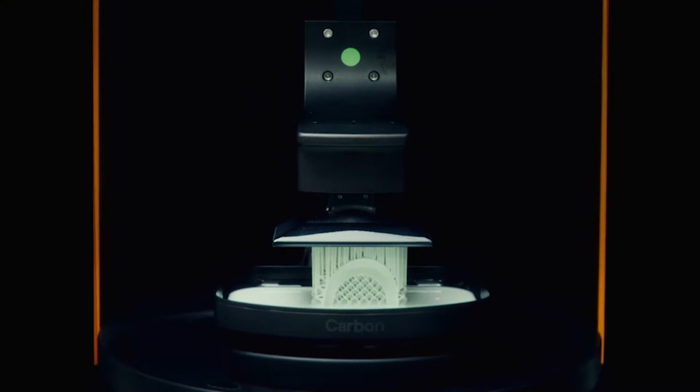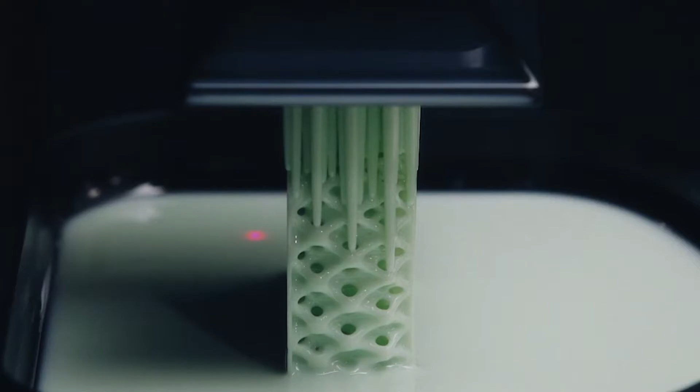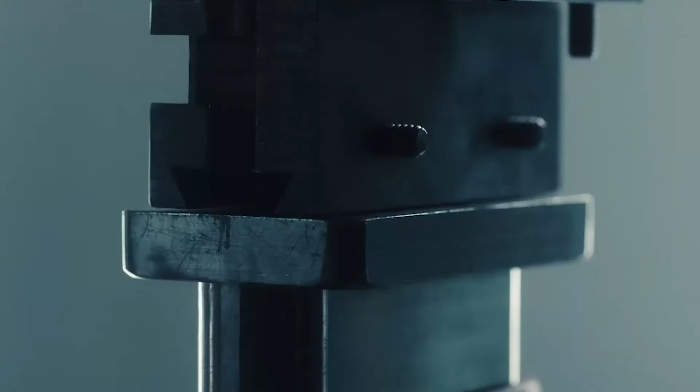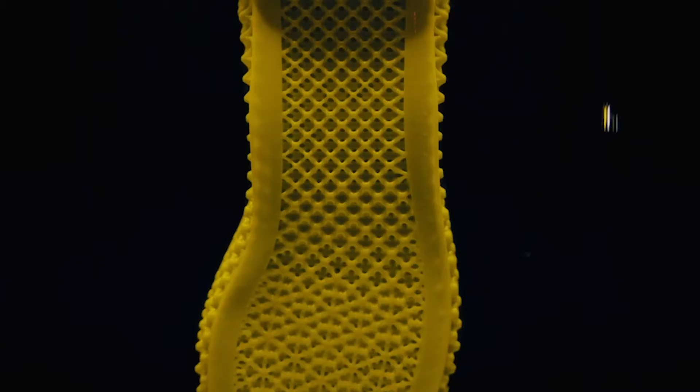So some of you are probably wondering why we're watching a video around athletic shoes when we're talking about healthcare innovation. Really what it comes down to is two things. Adidas approached us a number of years ago, and they had two problems they were trying to overcome.

First and foremost, they were trying to figure out a way to make a design that had kind of sat in the background for a number of years, a design they knew was going to improve the usability and the user interaction with the products they make. The second problem was, if we could make it, now we needed to go ahead and make it at scale and do so in a way that they could go to full production for this design concept that they had kind of mulled around.

While you can't see it, on my feet is the realization of both of those goals. That is what we are at as a company at our heart: finding different ways to take a problem and overcome those.

It's why Joe DeSimone, our founder and CEO, started the company a number of years ago, because he looked at what traditional manufacturing provides companies, what 3D printing provides companies, and asked: can we come up with a piece of technology, a suite of materials, and powerful software that allows us to eclipse all of the limitations associated with traditional manufacturing around design freedoms and lead times and a digital process, but also overcome the different limitations associated with 3D printing around speed, material properties, and material choices, into one easy-to-use piece of technology that opens up different opportunities for companies.

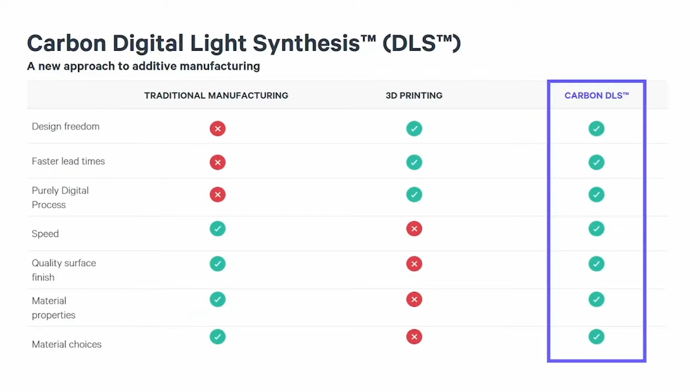If you zoom in specifically on our technology, we have a very simplistic build mechanism: a single lowering arm dropping down into a pool of liquid resin.

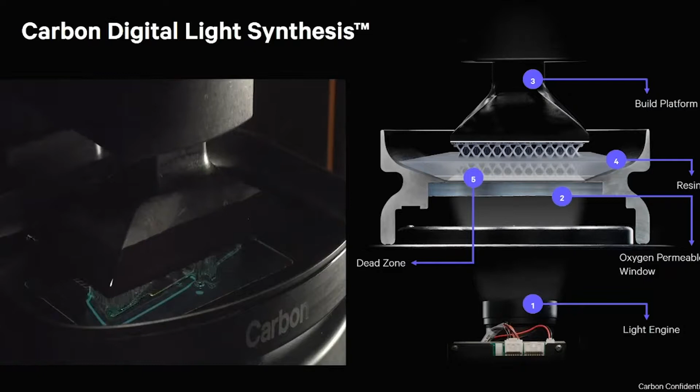We are then allowing light and oxygen to come up through that pool. What I want you to think of in terms of the light is it's acting like a chisel. Light is there to set the shape of whatever geometry you have put into our user interface. The key, though, is the oxygen. The oxygen prevents polymerization right at the level of the window.

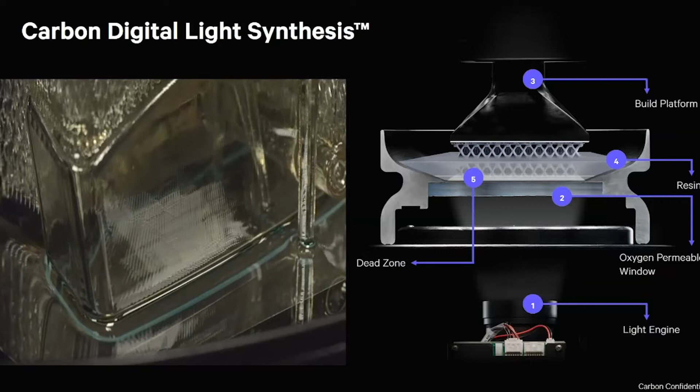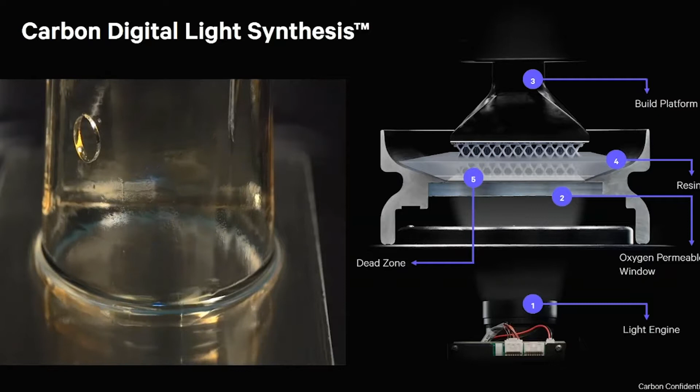We never have the parts sticking to the window during the build. With that, we can build with mechanical properties that are completely isotropic in the X, Y, and Z direction. We can build with surface finish often seen with injection molding, and we can build with a speed previously unforeseen in traditional SLA 3D printing.

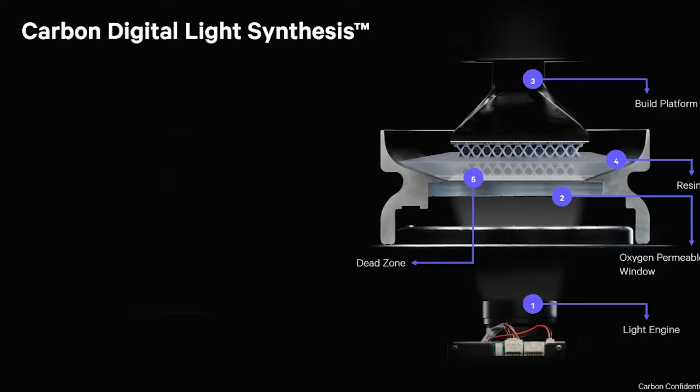If we zoom in on that dead zone in this video, you can see a better appreciation of how that process is working. You have a constant flow of resin that's coming underneath the building part that's rising up in the middle, and a continuous build allows for all of those different features that I talked about before.

If you were to break open any one of the parts, you would see a completely uniform substrate, something that is seen with traditional manufacturing and injection molding versus what is conventionally seen with a layered approach to 3D printing, where you have the potential for different failure points at each layer under a certain stress.

With that uniformity of the parts in any of the resins and any of the geometries that come off our printer, we have the flexibility to play with different orientation to either maximize the number of parts per build in a prototyping fashion, or increase the number of parts per build in a production setting, thereby drawing down the cost associated with that particular application.

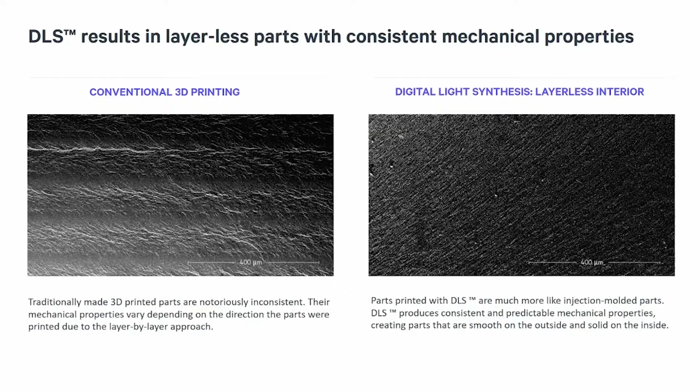So why digital and why now? Why is it ready? Why are we moving away from the potential of 3D printing or additive manufacturing to be just a prototyping modality, and now moving into full-scale manufacture?

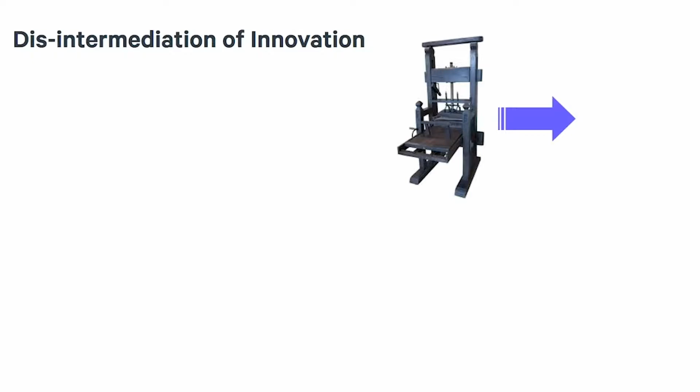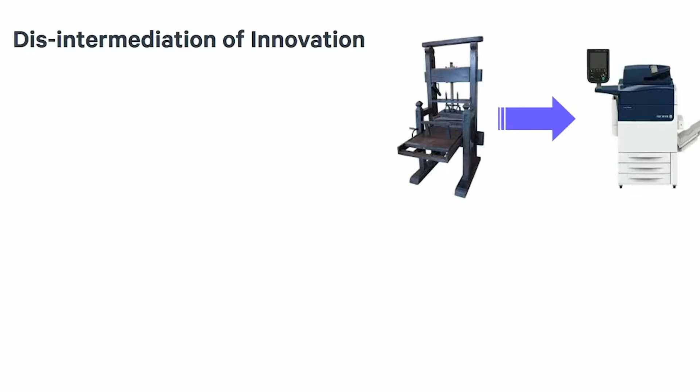To take a step back, we really have to look at a simple, old technology: the printing press. What the printing press gave you was a single unit to be able to share the written word. But the digital disruption that occurred when that went to a digital process, the sharing of ideas and how quickly the digital word could spread, not just in a community but around a country or around the world, really opened up a whole new path of how ideas were shared and fostered between individuals, even if they weren't in the same room. That same opportunity is actually happening now with digital manufacturing.

We have the ability to take innovation and be incredibly agile, to fundamentally change the way that people collaborate, to offer companies the opportunity to take an innovation timeline that might have been 12 to 18 months and shorten that down to possibly one month, one week, or even 48 hours, as a company I was working with last week was able to do.

What does that allow for different companies of different sizes? If you're a startup, can you take that innovation timeline and get your product to market faster? Or if you're a large player in the market, can you gain that first mover advantage on a brand new device before another 'me too' product comes out? What could innovation now look like in a purely digital sense, if we can innovate at the speed of thought, as many of our partners are doing, not only in medical device but across different segments?

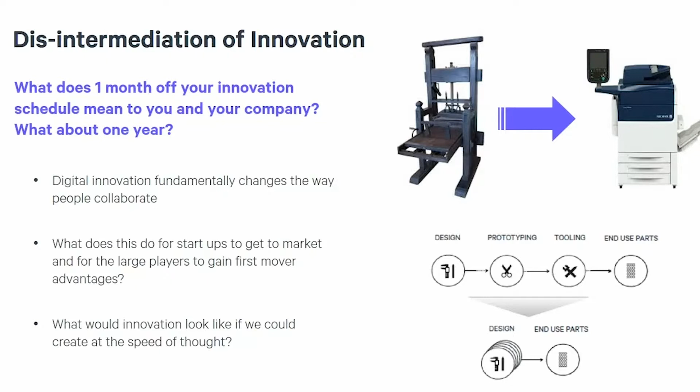The second piece: when we launched initially and came out of stealth with our founder and CEO, Joe DeSimone, during his TED Talk, one of the biggest things that was talked about was speed—the speed with which the printing process I talked about a few minutes ago is able to execute different parts at 25 to 100 times faster.

As our install base continues to grow, what's really a leading factor for many of our customers and partners is not only the speed, but the end-use materials and the different capabilities that the printer offers them to make products that are ready for the real world, in a variety of different resins with different mechanical properties that previously they only knew through injection molding or traditional manufacturing.

Part of what you see in front of you is the realization of that goal: that we can create different materials and have them be a close analog to what many of you are used to in injection molding. Each of these in the medical space has been tested for ISO 10993-5 and -10, and passed cytotoxicity, irritation...

...and sensitization for both long-term dermal contact and short-term mucosal contact, which gives our customers the baseline biocompatibility to feel comfortable that while the printer might initially be a design tool and a discovery tool for new designs and opportunities, it gives them the flexibility and agility to move to production with the exact same piece of equipment and the materials you see in front of you.

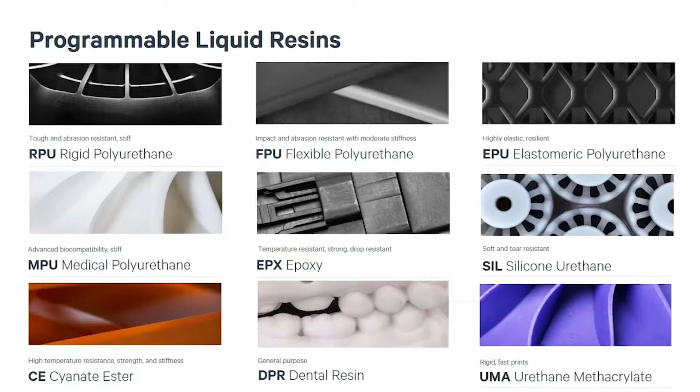In addition to that, we've actually done sterilization testing on all of these materials, to give customers another sense of confidence that if I am going to make an end-use part and product that can be rolled out to the community, I have a way to go about sterilizing it that's in line with what you're commonly used to in healthcare and healthcare innovation.

And finally, what's unique about our hardware is the cloud connectivity piece. That connected hardware allows for the machines to be adaptable.

Just like a doctor monitoring your health but not seeing where you are or what you're saying, we're constantly monitoring the health of all the hardware out there at our partners around the world, making sure we can have predictive service to achieve best-in-class machine uptime as we come out with new software, new resins, and new features to further the opportunity for you to design at the speed of thought.

All of that update can be sent over the air to any site in the world. What we can't see, what still is protected by you and sits behind your firewall, is your designs. That's your proprietary information, and it continues to sit there. But what we enable is the hardware to be more powerful each day you have it than the first day you put it in, allowing it to adapt and be agile as you push the bounds of innovation within healthcare, so you have a machine that's adapting with you.

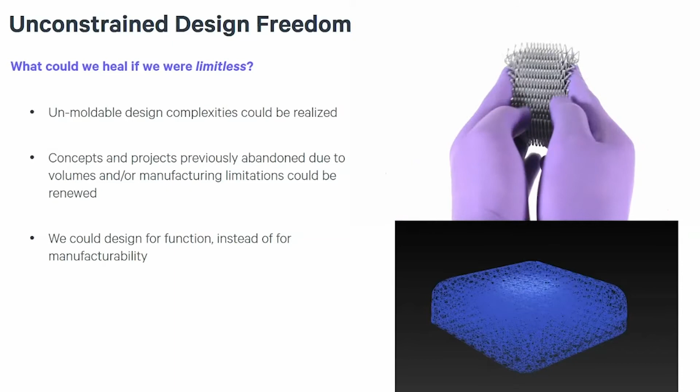If we drill down specifically as to why most healthcare companies come to us, what are they looking for? It really comes down to three main components.

The first one, similar to the Adidas application we saw from the video, is the unconstrained design freedom. Maybe there's a design that you've had on the back burner for a number of years, never brought it out because there was no way to make it. Now is the time to dust that off.

Now is the opportunity with the hardware and the ability for the parts that come off it to be end use, with the number of resins we offer, to potentially have a brand new treatment paradigm or a brand new device that can be rolled out to the market. Concepts and projects don't have to be abandoned because of the flexibility and freedom offered with the technology.

We have a number of different opportunities that our partners are pursuing, both on their own and along with us, to achieve different treatment paradigms or opportunities for the patients they serve.

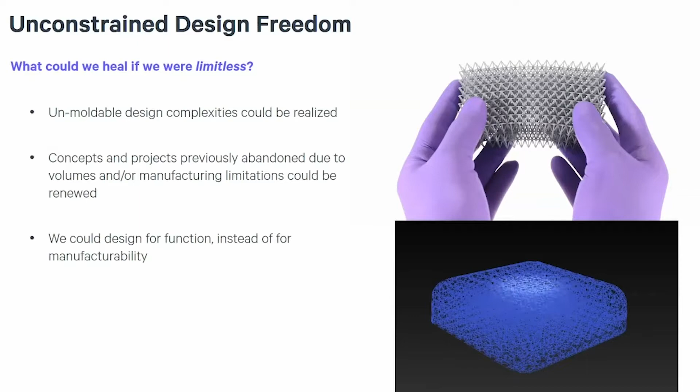One of those in particular is the part that you see in front of you. This is a partnership we're working on with a company that wants to improve the way hospital beds in particular are made. Very simple transfer of information as to what they were looking for.

But the end use product you see in front of you, and the opportunity for the patient, allows for the potential to cut down on decubitus ulcers, to improve the skin degradation associated with these bedridden patients, and maybe even open up other treatment paradigms where we're injecting humidified or medicated air through this open cell lattice to allow that patient a better quality of life while in the hospital.

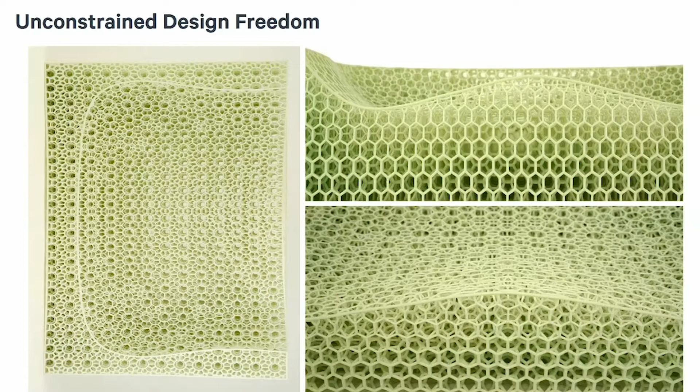The second main component we see a lot of companies come to us for is around manufacturing economics. Let's say you have an application in mind. You're a startup company, you don't know how many units you're eventually going to need. You'd love to see it be in the millions, of course, but potentially the projections are in the tens of thousands. What is the cost associated with the design iterations and the cost of tooling to make those products? And what is the time associated to get that product made to bring it to market?

If you have the opportunity, as you see with the part on the right—it's a part from Becton Dickinson—to iterate quickly, to move to market with an end-use product direct off the printer, not only can you condense the timelines to be profit-generating, but you might offer up a different opportunity for where that product can go, and the number of iterations for version 2, version 3, however many it's going to be for the future of that product.

Potentially, we could get to the point where we're moving towards patient-matched items, where we can look at service or replacement parts, warranty parts, where the old way of dusting off the old mold, bringing it back into production, and putting that mold back into a manufacturing plant doesn't have to happen anymore. We can be more agile as we service and warranty different equipment as they're out in the field for 10, 15, or even 20 plus years.

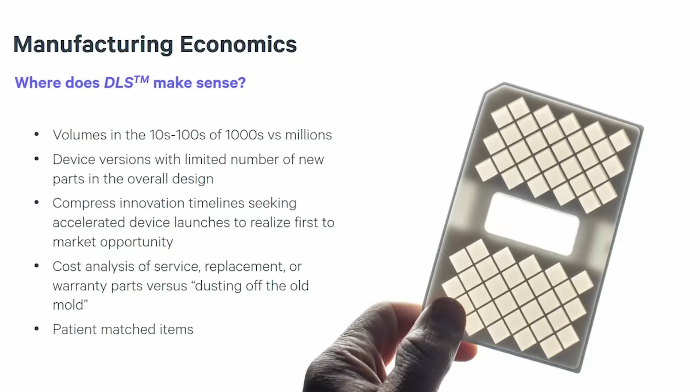Some of our partners are moving towards additive for the parts that are going to change from one iteration to the next, allowing them to be more agile in terms of the rollout. Knowing that the materials and mechanical properties will match the injection molded parts they're mating with gives them the agility and flexibility to take that next iteration to market faster than waiting for the next mold to be made for those 5 or 6 parts.

Continue to injection mold the parts that are going to be consistent, the ones that will last for 10, 15, maybe 20 years. You'll achieve greater cost efficiencies by doing that, but you'll also allow yourself design flexibility and revenue flexibility by taking the parts that do change and doing those with additive.

And then finally, another component we see a lot more of as additive starts to take hold across a variety of industries is design for additive. Take the part on the right-hand side: 3 injection molded parts, 2 O-rings, 8 screws. The soft tooling for this device, a strain relief for an electrical connector, is $9,000 just to get it through the prototyping stage.

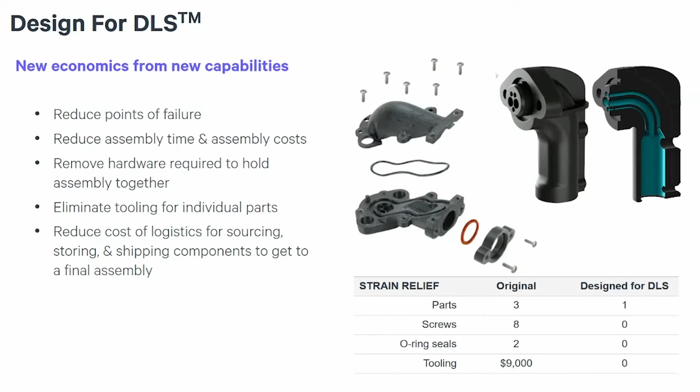The logistical cost savings for this particular customer, of not having to source the screws from one location, the injection molded parts from a second, the O-rings from a third, and assemble it in a fourth, made the move to additive far more cost effective. They weren't looking to 3D print the entire device, just the components that made the most economical sense.

Another example is the work we did with Vitamix, for a simple design on a device meant to clean the blenders in each of the Starbucks that some of you probably visited this morning. It originally had 6 different injection molded parts.

Through finite element analysis, we were able to simplify that design, creating one monolithic part, reducing the mass associated with it, and improving the overall performance of this particular application for the different customers it serves.

We're working on a number of projects with a similar story, where customers come to us and say, I know this is over-designed, but it's done that way on purpose because that's how we're going to manufacture it. Then we go through the path of what we could do through additive to simplify it, reducing the number of parts maybe from 10 to 5, or from 5 to 1, allowing for different creativity and flexibility as customers move through the innovation cycle and get to market.

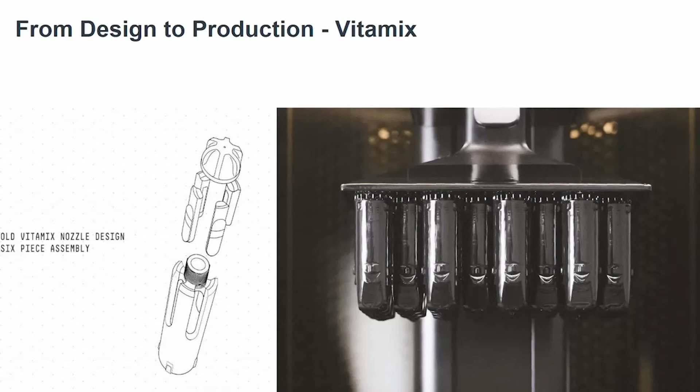All of this is accomplished on the piece of hardware in front of you. This is our M2 printer. It has a build volume of 189 millimeters by 118 by 326, with a pixel size of 75 microns.

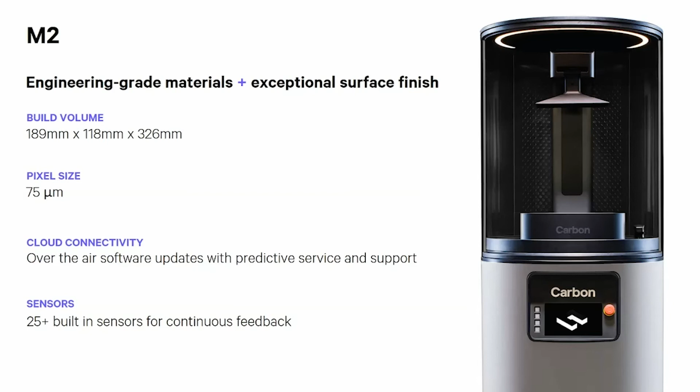As I mentioned earlier, all of it is covered under over-the-air software updates with predictive service and support, and a number of different sensors that we're constantly monitoring for the health of the printer over its entire life. The second piece is our parts washer.

It serves as an opportunity to further automate your entire production line, extending the digital thread from the STL file through the printing process and all the way through post-processing, so you have a repeatable, effective washing for any part you make, and a full digital record to be submitted to whatever governing body is necessary.

So what I hope we covered today is the opportunity to discuss competitive advantages. This was not a talk designed to say, go make this application, it's perfect, and you can go make a billion dollars for your companies.